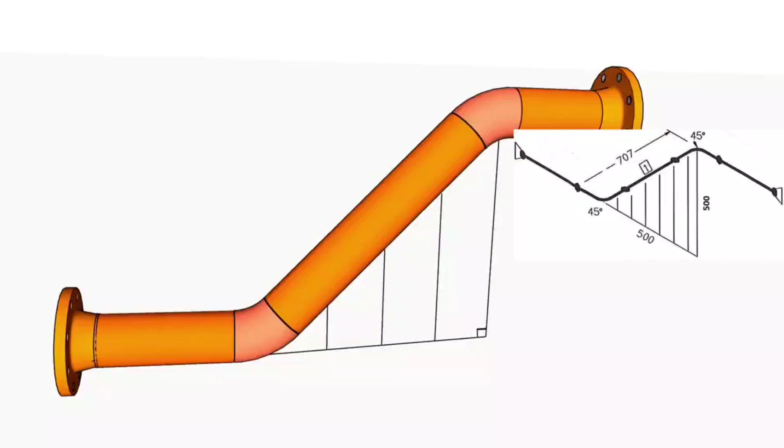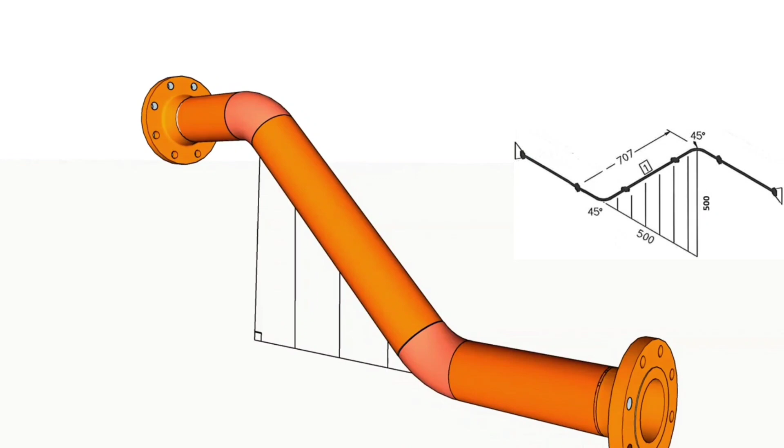In some isometric drawings, it is required to calculate the length of pipe. In this video, we will learn how to calculate pipe and pipe fittings length on the pipeline. If you watch the video until the end, I'm sure you will learn a lot of useful information about pipeline calculations. Let's start the piping tutorial video.

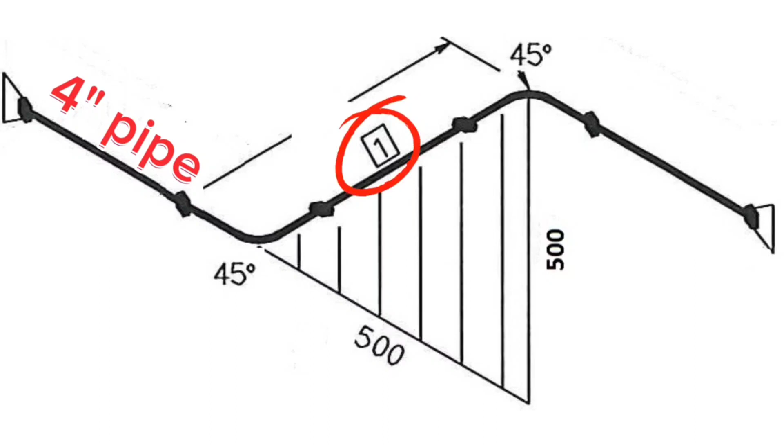In this video, we will use a 4-inch piping isometric drawing and 3D model view of the pipeline. It is required to calculate the length of pipe number 1 between the two elbows in this pipeline. For this, we must first find the distance from the center of the elbow to the center of the elbow. We will use a 3D model view of the pipeline to better understand these calculations. We need to calculate the length of this piece of pipe.

As you can see, the horizontal part of the pipeline goes up here using a 45-degree elbow, and at this point it goes back to horizontal again using a 45-degree elbow. First, let's calculate the distance from the center of one elbow to the center of the other elbow.

Let's complete these crossed lines into a triangle. For this, we move this red line, which shows the distance between the elbows, parallel to the bottom, and connect the dashed lines to form a triangle.

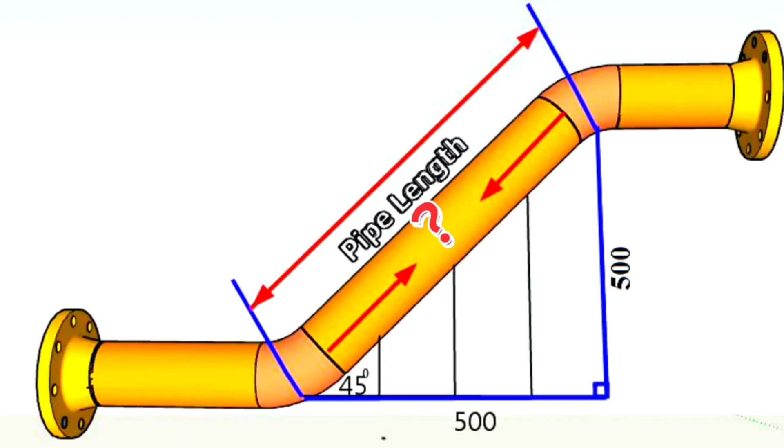A right-angled triangle with perpendicular sides of 500 mm was formed. The hypotenuse of this triangle will be equal to the distance between the elbows.

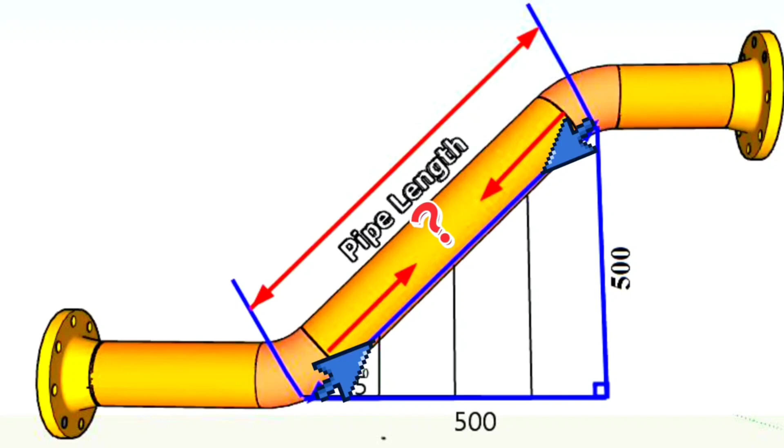Let's calculate the length of the hypotenuse of this triangle using the Pythagorean theorem. The Pythagorean theorem states that the square of the length of the hypotenuse is equal to the sum of the squares of the perpendicular sides. If we write the hypotenuse as h, then h squared is equal to 500 squared plus 500 squared.

We continue the calculation. The square of h is equal to 250,000 plus 250,000. We continue the calculation again. The square of h is equal to 500,000. Here, after freeing h from the square, we found that the length of h is equal to 707 mm.

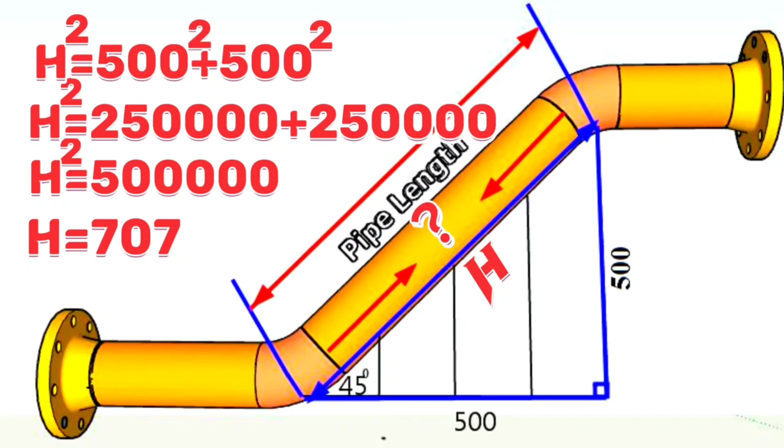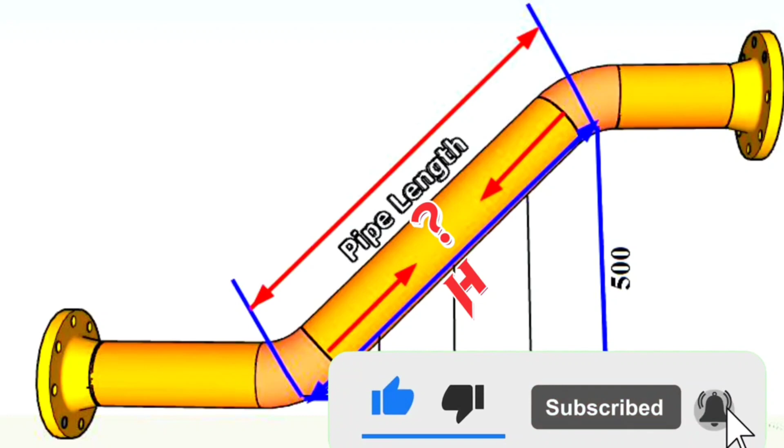There is another way to find the hypotenuse of a right-angled triangle with equal perpendicular sides. Different formulas are used for this. To find the length of the hypotenuse, you need to multiply the length of the perpendicular side by 1.4142. That is, h is equal to 500 multiplied by 1.4142.

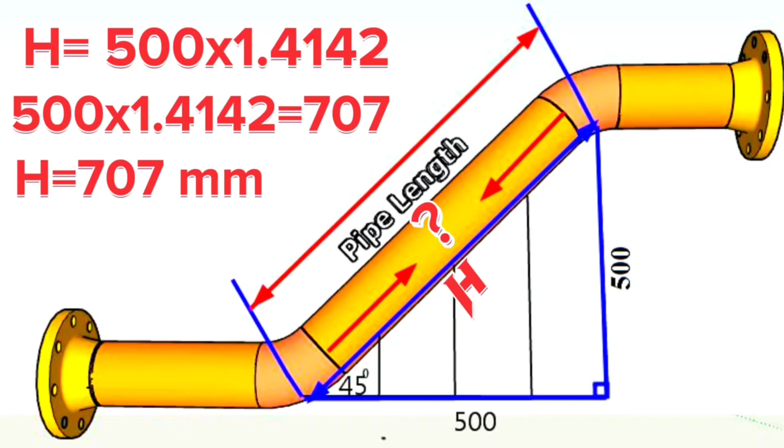We continue the calculation and find that 500 times 1.4142 is equal to 707 mm. The length of your hypotenuse is 707 mm. The distance from the center of the elbow to the center of the elbow was 707 mm.

There are two 45-degree elbows here, and if we subtract their lengths from the total distance, we can find the length of the pipe piece.

Let's look at the standard size chart of elbows. This table shows the dimensions of the most commonly used 45-degree and 90-degree elbows in pipe fabrication. In this table, you can easily find the dimensions of 45-degree and 90-degree long radius and short radius elbows. Elbow size refers to the distance from the center of the elbow to the end of one side.

From the pipe elbow dimensions chart, we find that the length of a 4-inch, center to end, 45-degree elbow, long radius is 64 mm. Center to end shows B, which is the dimension of the 45-degree elbow.

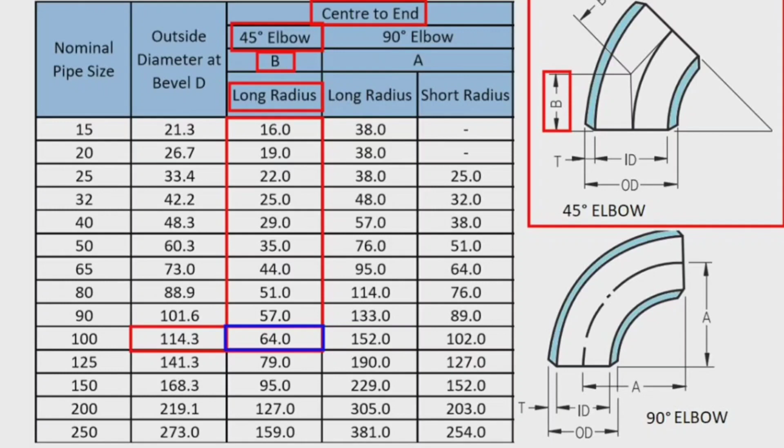In this isometric, there are welds in two places. If we count each weld gap as 3 mm and the elbows as 64 mm, then the length of the pipe will be equal to the total length of 707 mm minus 64 mm minus again 64 mm minus 3 mm minus 3 mm. Thus, we calculated and found that the length of the pipe is 573 millimeters.

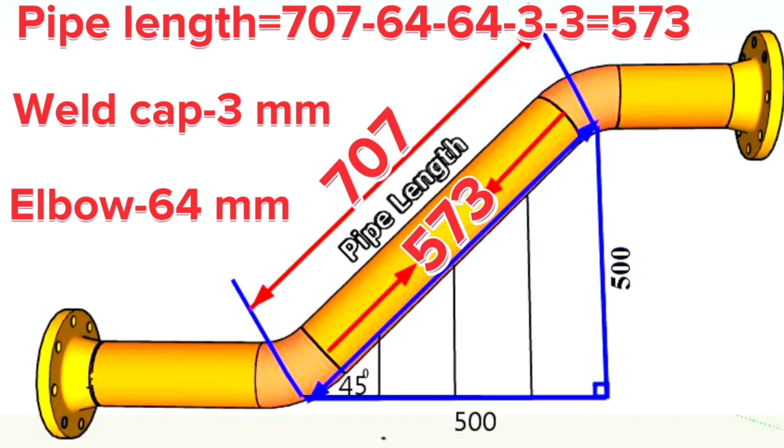It is very important to calculate the length of pipes that will be used in pipelines in pipe production. Most of the time, job exams require the calculation of pipe materials according to the isometrics in pipe drawings.

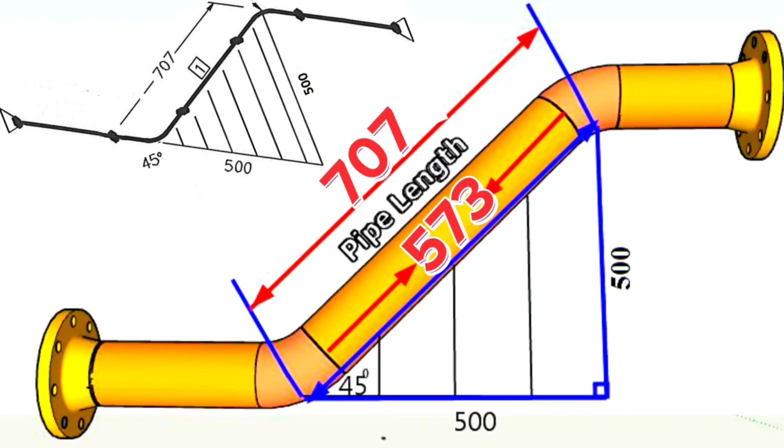Let's take a look at this pipeline's 3D model view, so we can easily see the pipe pieces and pipe fittings used in this pipeline.